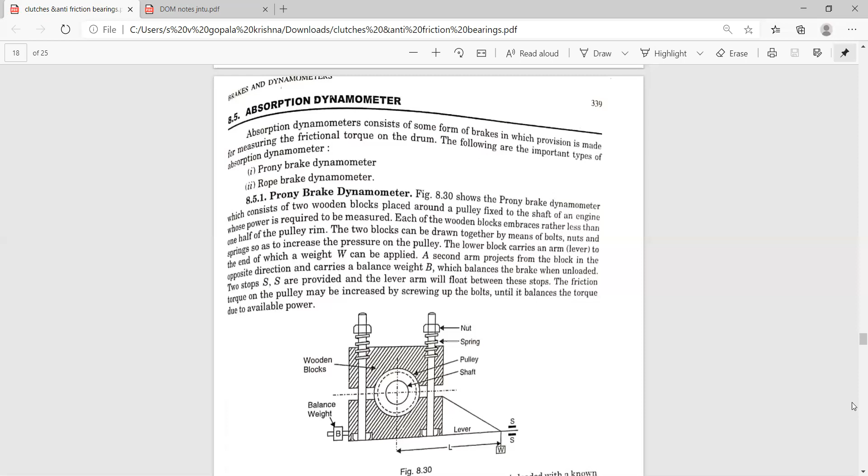Coming to the Prony brake dynamometer, observe the diagram. It consists of two wooden blocks arranged around the fixed pulley of an engine, fixed to the shaft of the engine.

These two wooden blocks are placed upon the pulley shaft. One block is put on the lower side of the pulley, and another block is put on the upper side of the pulley.

These two wooden blocks are tightened with the help of bolt, nut and springs.

The lower wooden block has one lever. One end of that lever carries the weights, and the other end carries some balancing weight. Whatever weights are carried, that dead weight is carried on another side, the right side.

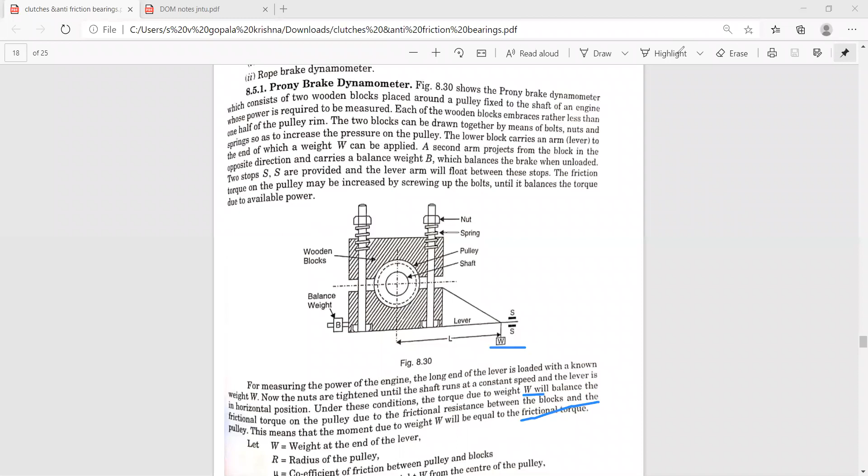Okay, frictional torque. Now all of you observe that. So here you will have some small calculation portions. Just observe that before going to that portion. So we will know the notations.

So those are the W, weight at the end of the lever, capital R, radius of the pulley, mu, coefficient of friction, and L, just all of you observe the diagram. L is the horizontal distance of the weight from the center of the pulley, and n, speed of the shaft in rpm. Now torque on the shaft, T equals load into perpendicular distance.

So the load is how much load is carried at the end of the lever, capital W, into distance L.

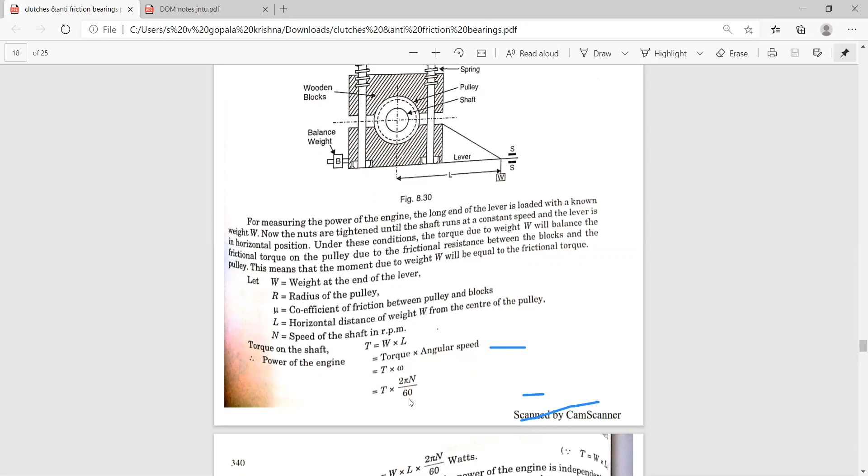Now power of the engine means torque into speed, angular speed. So that is torque value T and angular speed represented with omega. Then omega is also replaced with 2 pi n by 60. So then the value is WL into 2 pi n by 60 when we substitute the T value in our equation. So this is the power of the engine.

So here one of the conditions is there: the power of the engine is independent of the pulley.

This is following some factors: the radius of the pulley is one of the things, coefficient of friction between the pulley and wooden blocks, and pressure exerted by tightening the nuts. So these values are not affecting the power of the engine.

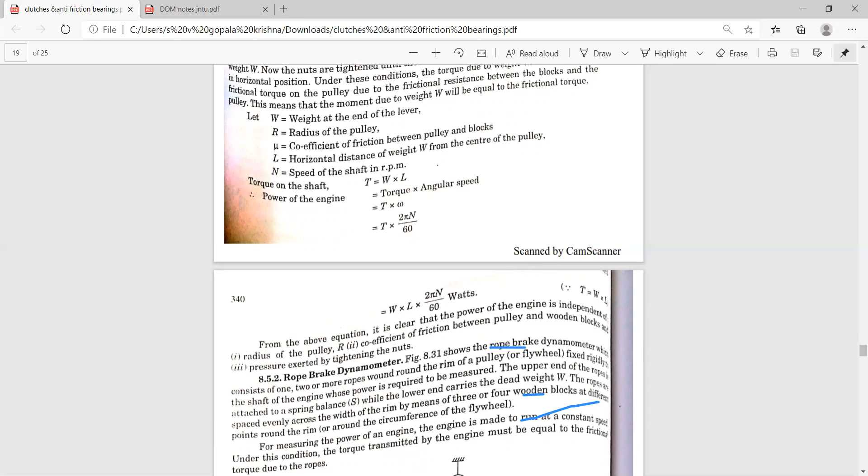Now going to the next topic, that is another type: rope brake dynamometer. Just observe the diagram, rope brake dynamometer.

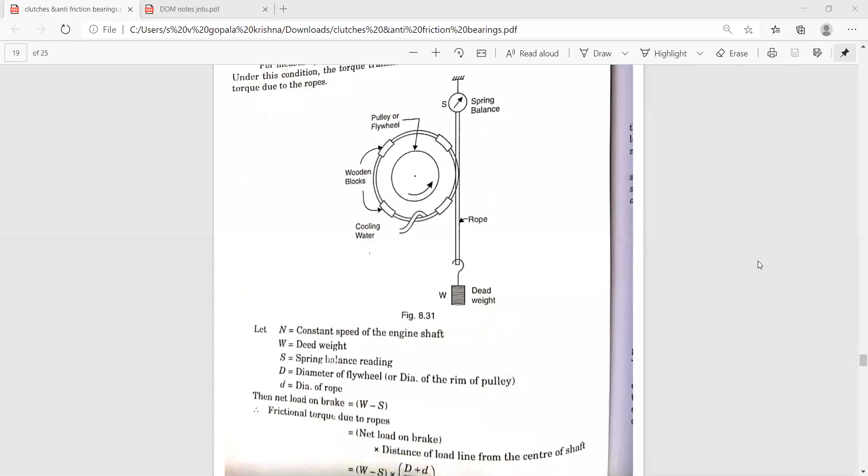So here, if you observe the diagram, rope brake dynamometer, it is consisting of one or two ropes around the rim of the pulley. This is the rope, and that rope is around the rim of the pulley.

The upper end of the rope is attached to the spring balance, and the lower end of the rope is carrying the dead weight.

These ropes are spaced evenly across, spaced with the wooden blocks. So here we may also use 4 wooden blocks at different points: one, two, three, four points are there.

So this is the arrangement in our rope brake dynamometer. So when we are measuring the power of the engine, the engine is made to run at constant speed, so the shaft, pulley, and flywheel run with a constant speed.

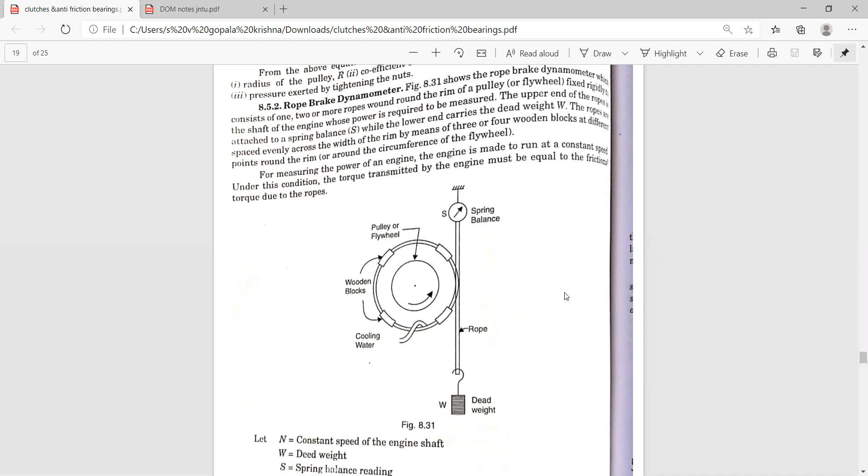So now we are also having a small calculation part here, with the arrangement shown. Now let us know our notations: N, constant speed of the engine, W, dead weight, S, spring balance, capital D, diameter of the flywheel, and small d, diameter of the rope.

Now we are taking net load on the brake: how much weight is applied here. That is capital W subtracted by the spring balance weight S, so W minus S is the net load on the brake. Now going to write the frictional torque due to the ropes.

So that is our net load into net load on the brake into distance of the load line from the center of the shaft. So frictional torque, that means the value is load into our perpendicular distance. So the load value is W minus S into distance of the load line from the center of the shaft.

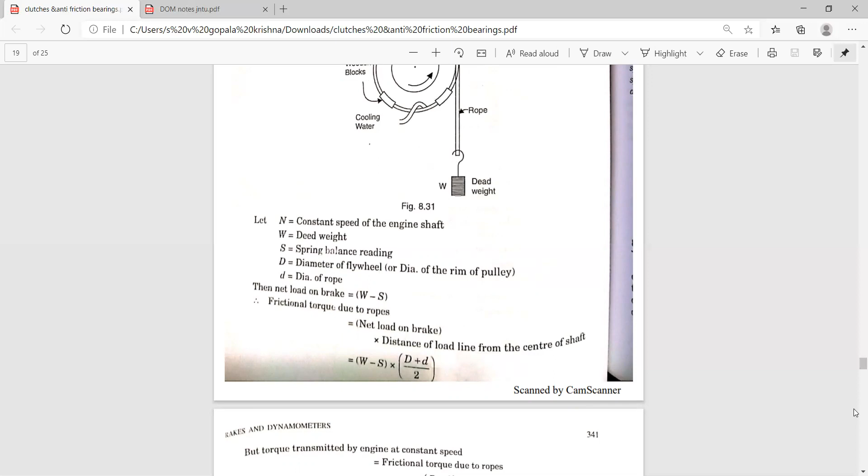That is capital D, the pulley or rim diameter, plus dia of the rope, divided by 2. That is the average of that one.

Torque transmitted by the engine at constant speed is also similar to that one: W minus S into capital D plus small d by 2. That is frictional torque due to the ropes.

Therefore, brake power of the engine equals torque transmitted by the engine into angular speed of the engine. So the torque value is W minus S into capital D plus small d by 2, into omega. Omega is replaced with 2 pi n by 60 in the next step. So then the value is W minus S into capital D plus small d by 2, into 2 pi n.

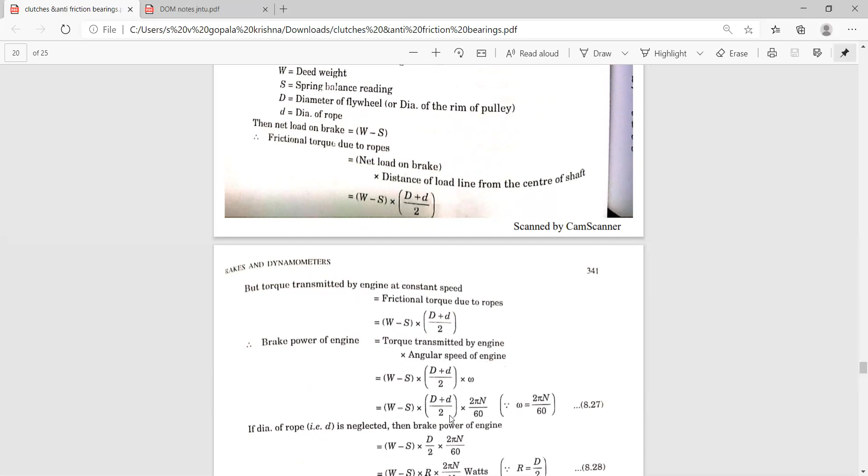Now consider one condition: when the rope dia is neglected in our equation. Then the brake power of the engine equals W minus S into capital D by 2 into 2 pi n by 60. It may also be written as W minus S into R into 2 pi n by 60 watts. This condition is also there.

They may also arrange a cooling system for the rope brake dynamometer. If the brake power of the engine is very large, it may produce more friction between the rope and our flywheel. So for cooling, we may arrange a cooling system for reducing the friction levels between the rope and the flywheel.

In this setup, cooling is also given to the pulley. One side arranges to cool it by sending water through one channel section, and on another channel side the cold water is supplied at one point and removed at another channel section. So the water is also wetted to our rim and our rope. That is also what happens in this particular system.

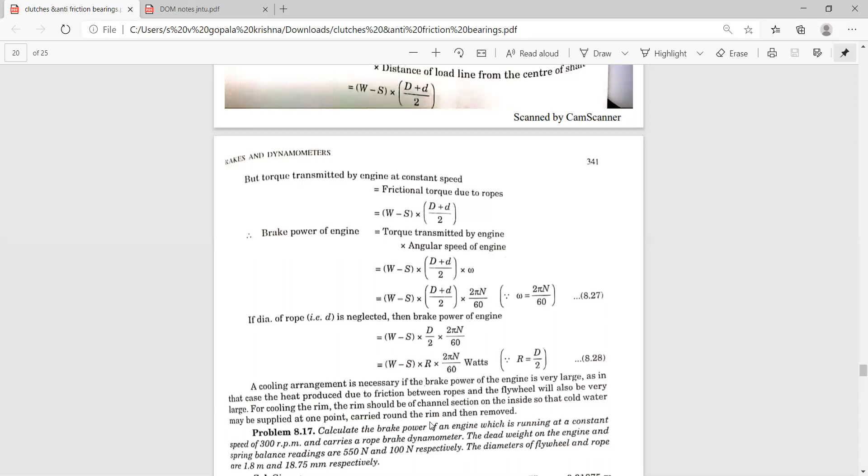Now observe this small problem: calculate the brake power of the engine, which is running at a constant speed of 300 rpm and carries a rope brake dynamometer. The dead weight of the engine and the spring balance readings are 550 newtons and 100 newtons respectively. The dia of the flywheel and rope are 1.8 meters and 18.75 mm respectively.

So now from the problem description, we will write our given values: N is 300 rpm, W is 550 newtons, S is 100 newtons, capital D is 1.8 meters, small d is 0.01875 meters.

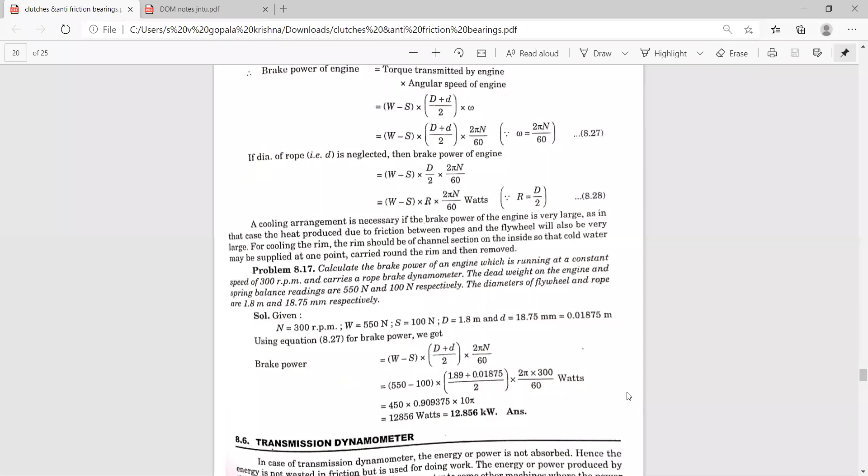In this problem, just directly substitute into the brake power formula: brake power of the engine equals W minus S into capital D plus small d by 2, into 2 pi n by 60. Substituting all the values, we get 12,856 watts, which may also be written as 12.856 kilowatts.

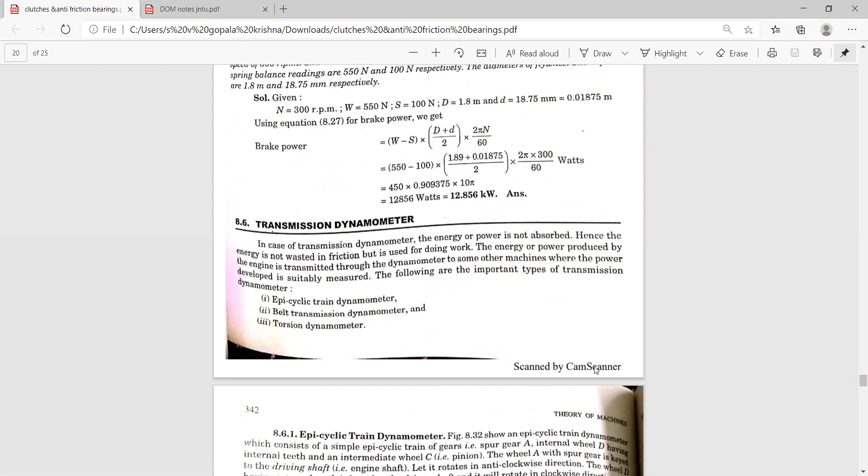Now going to the next one: transmission dynamometer. From the transmission dynamometer point of view, the frictional torque that is produced when applying brakes is also utilized, meaning that power is not wasted. It will make some work or perform some function. This happens in our transmission dynamometer, which is also a measuring device.

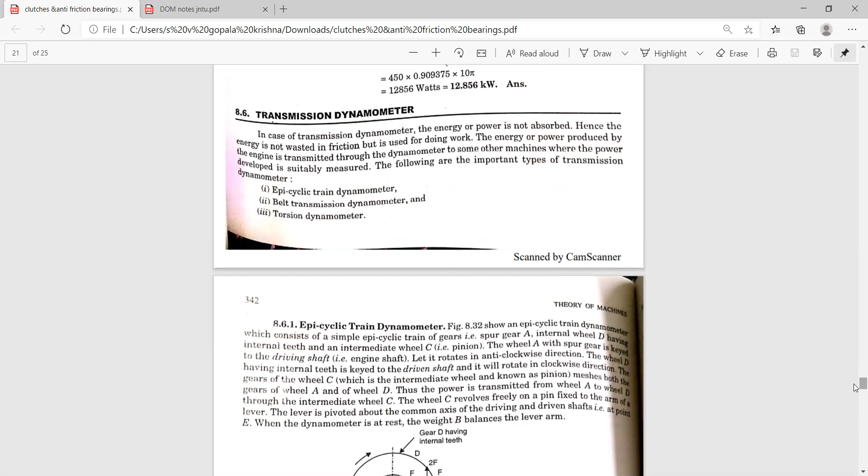It is again classified into three types: epicyclic dynamometer, belt transmission dynamometer, and torsion dynamometer. Now coming to the first one, let us look at the epicyclic dynamometer. Just observe the diagram.

Epicyclic dynamometer is here. It is consisting of epicyclic train of gears. Spur gear A is there, intermediate gear C, and annulus gear or internal gear D is there. The internal gear is having internal teeth - this is the annulus gear. Gear D has internal teeth, pinion gear C is there, and spur gear A is there. So what is the system? That is the epicyclic train of gears.

In this system we are also having a lever or lever arm. That lever arm passes through and is connected with the gears. The lever is pivoted at point E, that lever end is pivoted to point E.

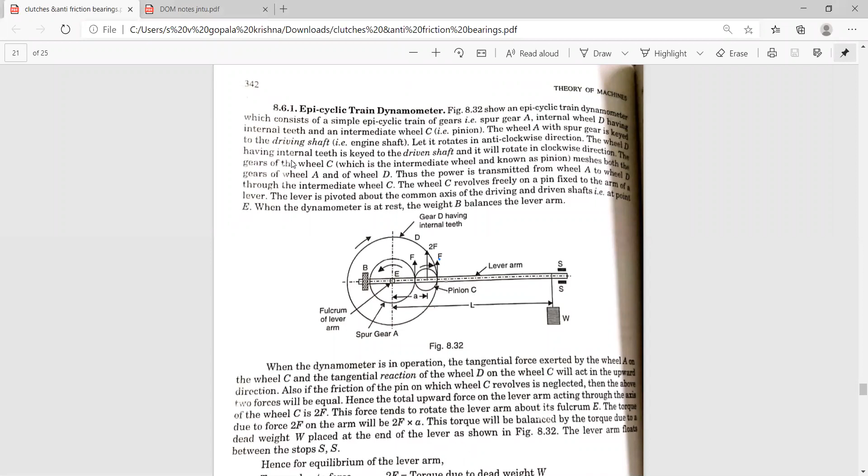Now, taking the equilibrium condition, consider the equilibrium of the lever. Torque due to the force, that is 2F into a, equals W into L. From that, F equals WL by 2a.

Now, torque transmitted by the engine - simply write it as force into distance. That force value is how much?

WL by 2a into R is there. R is the okay value is there. R, capital R, is the radius of wheel A.

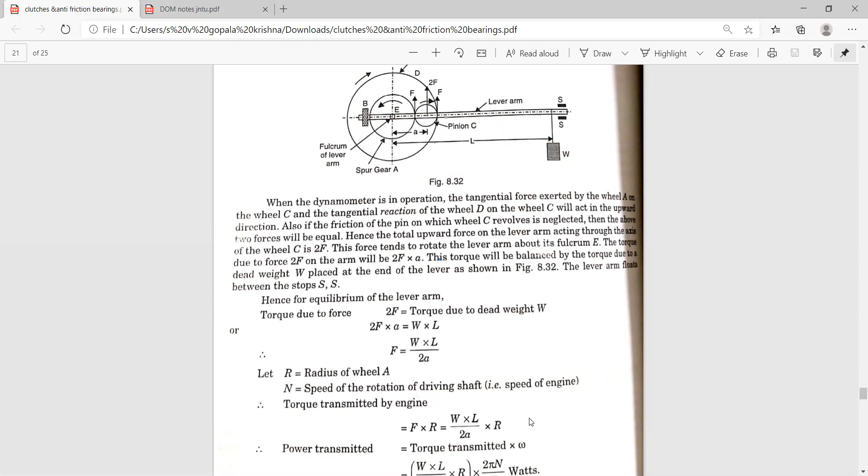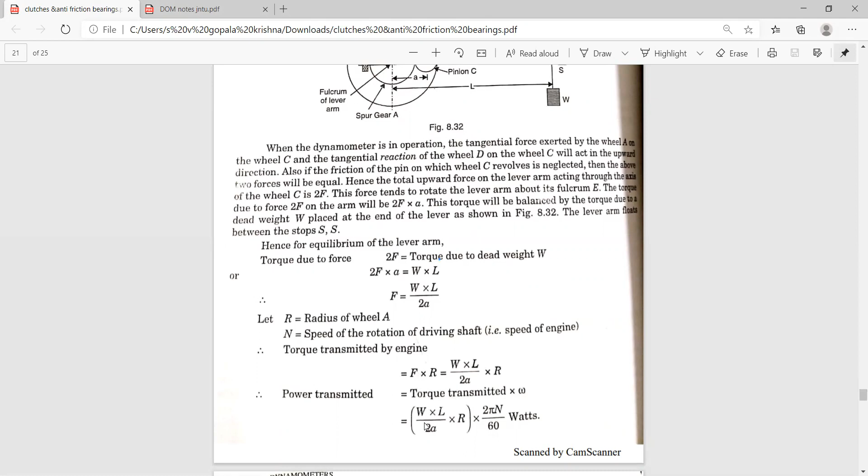Now the power value. We may also write the power transmitted on the engine. That is the torque transmitted into omega, the angular speed, angular velocity.

So then that means WL by 2a into R into 2 pi n by 60. So that is our epicyclic transmission dynamometer. Here observe what gears are involved, and how to transmit the power.

That transmits the power means, observe that the spur gear A rotates in the anti-clockwise direction. Then it will transmit the power from A to the pinion gear C, and the pinion gear also transmits the power to the gear wheel D.

When the system is in stationary mode, it may also try to balance the particular lever with the help of a balance weight, our balanced weight.

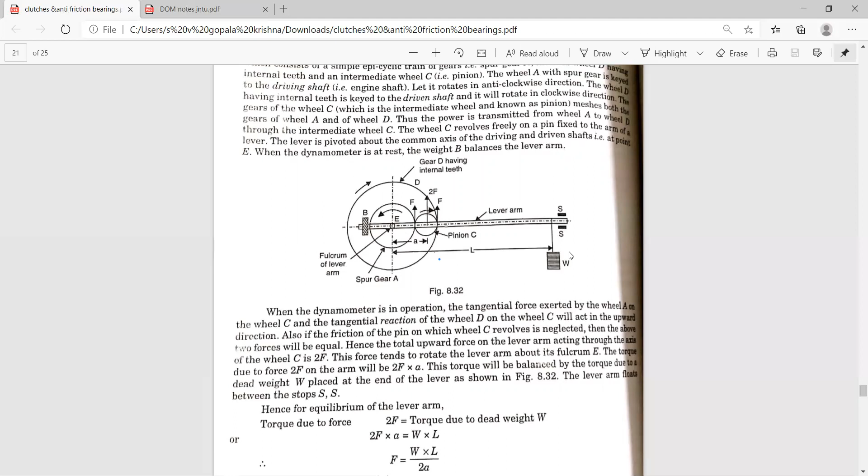So this is our epicyclic transmission dynamometer. Now going to see the belt transmission dynamometer. Observe the arrangement of the belt transmission dynamometer.

Mainly there is usage of two pulleys. One is acting as the driving pulley and another as the driven pulley. And there are two supporting pulleys, the intermediate pulleys C and D.

Now we also take one lever. That lever is pivoted at E, and it passes through the C and D pulleys also. The lever carries a dead weight on one side, and that lever end is also between two stops.

Two stops, and another end is carrying the balancing weight. So now we are having our belts.

Now we give the belt system, the belt passes through our particular pulleys. When we arrange the belt from the driving pulley to the driven pulley, it also crosses our intermediate pulleys D and C. So that is the system, observe that.

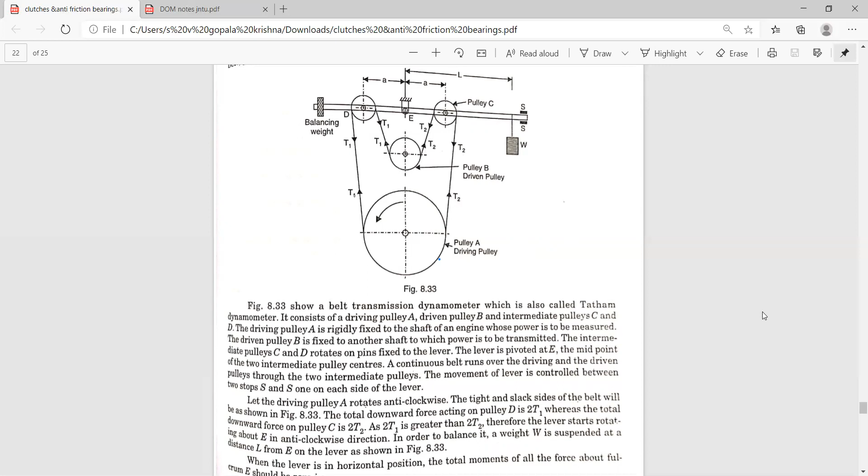Now, when the lever is in horizontal position, the total moments of all forces about the fulcrum, capital E, should be zero. So they say that when the lever is in horizontal position, that means it will be balanced, so the moments of all forces about fulcrum E should be zero. So then total anti-clockwise moment, and total clockwise moment - they take the momentums to the anti-clockwise and clockwise directions.

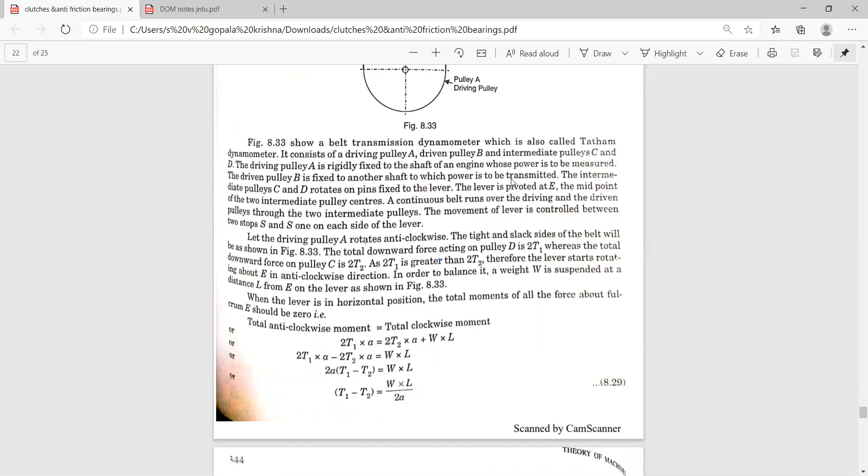Those are 2T1 into small a. Why? Because of the distance between our tensions - that means the pulley D tension and pulley C tension. a, a is there, and L is the distance from the dead weight to the pivoted point.

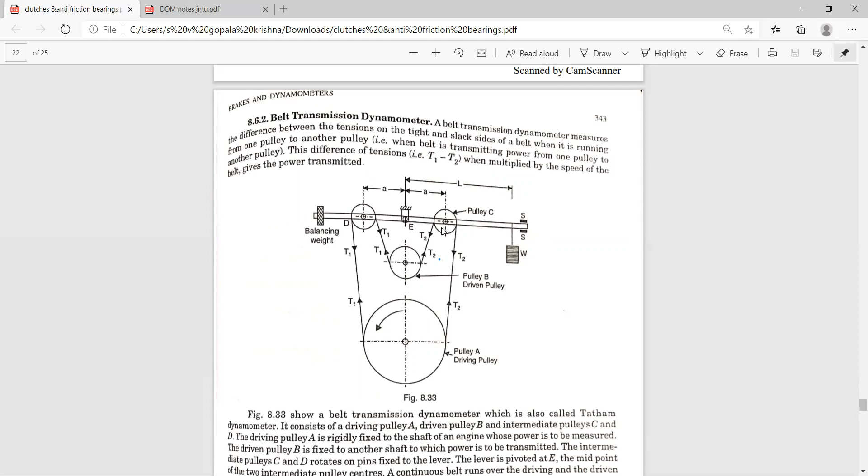So now you observe the moment at the pivoted point, capital E. That is 2T1 into A equals to 2T2 into A plus WL. Now, simplifying the equation, you may write T1 minus T2 equals to WL by 2A.

So now they also write the power of the engine. Why? Because tension is already calculated here, between the tight side and slack side - that is T1 minus T2 equals WL by 2A.

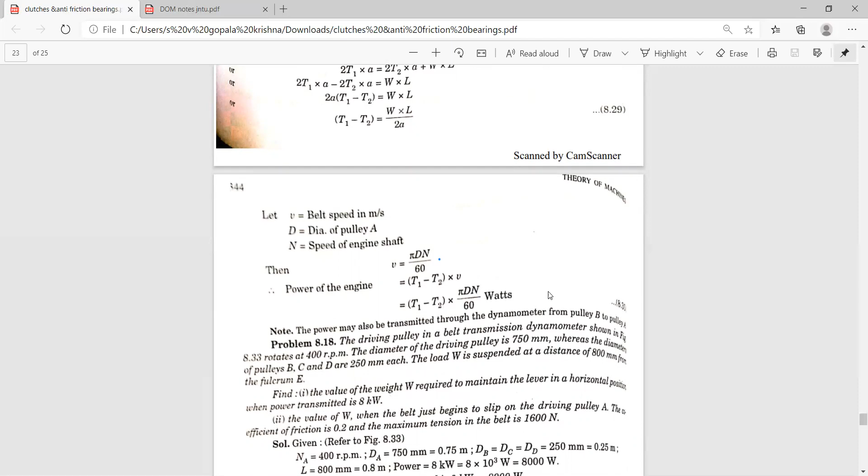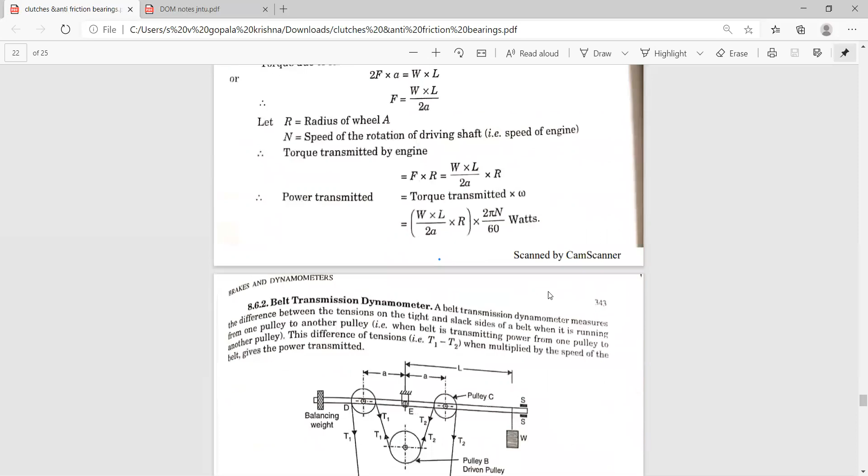Then power of the engine equals T1 minus T2 into V, the belt speed. So T1 minus T2 into V can similarly be written as pi dn by 60, just substituting the value. So this is the power of the engine for this belt transmission dynamometer.

Now the last one, the torsion dynamometer. Observe that it works on the principle of torsion - that means when we are twisting our shaft, we get some torsion.

So we take the torsional equation directly: T by J equals C theta by L, with values already known. So T by J equals C theta by L, and similarly torque T equals C theta by L into J. J is substituted here as pi by 32 into D naught power 4 minus Di power 4 for hollow shafts, while for solid shaft it's pi by 32 D power 4.

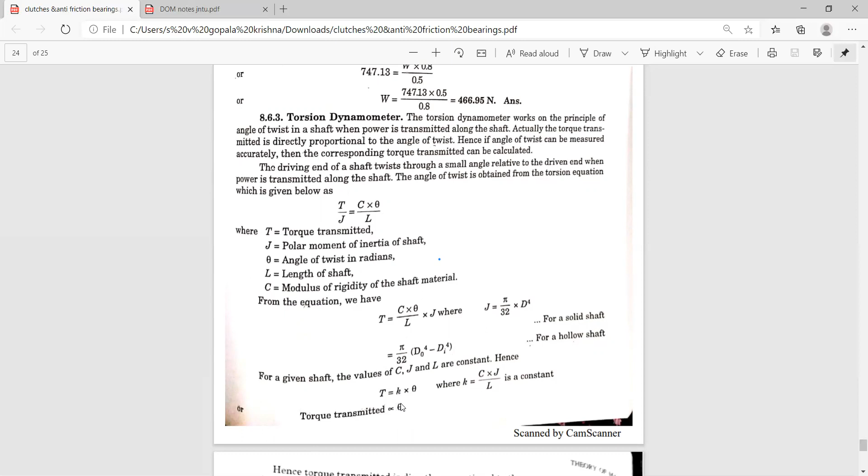So T equals K theta. They write it as T equals K theta because C, J, L are all considered constants. That means torque transmitted is proportional to the angle of twist theta - torque transmitted to angle of twist theta. So that is the torsion point of view.

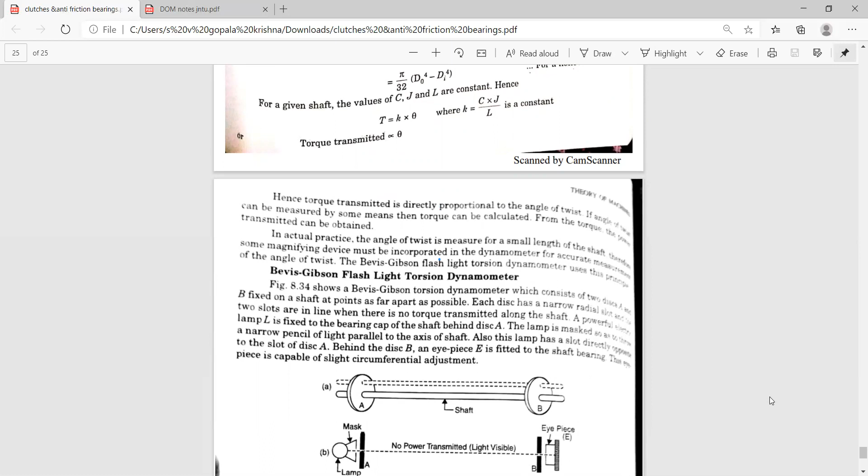And here, what type of dynamometer is there? That is taken as the Bevis Gibson flashlight torsion dynamometer.

Okay, A and B both are having the slots. Here, just observe that each disc has a narrow radial slot.

The slot and the lamp, and the two slots are in line. When there is no torque transmitted along the shaft, a powerful electrical lamp L is fixed to the bearing cap of the shaft behind A, and the lamp is masked so as to throw a narrow pencil of light parallel to the axis of the shaft. So this lamp has a slot directly opposite to the slot of disc A.

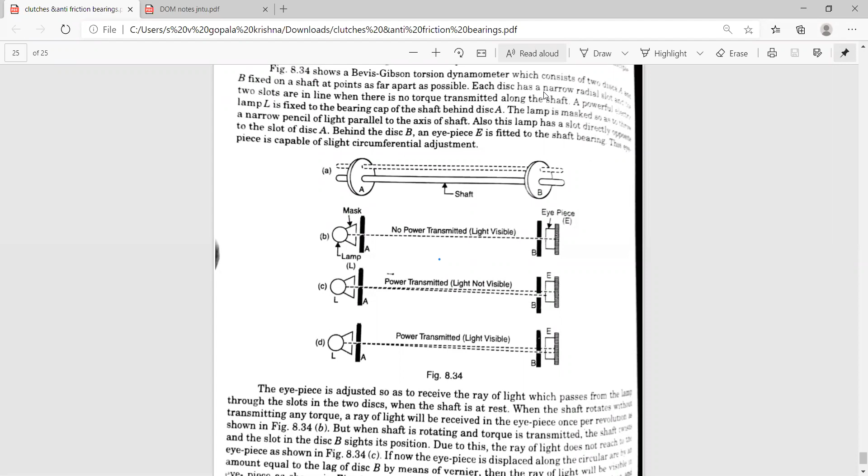And when the shaft is rotated without transmitting any torque, a ray of light will be received in the eyepiece once per revolution, as in figure B.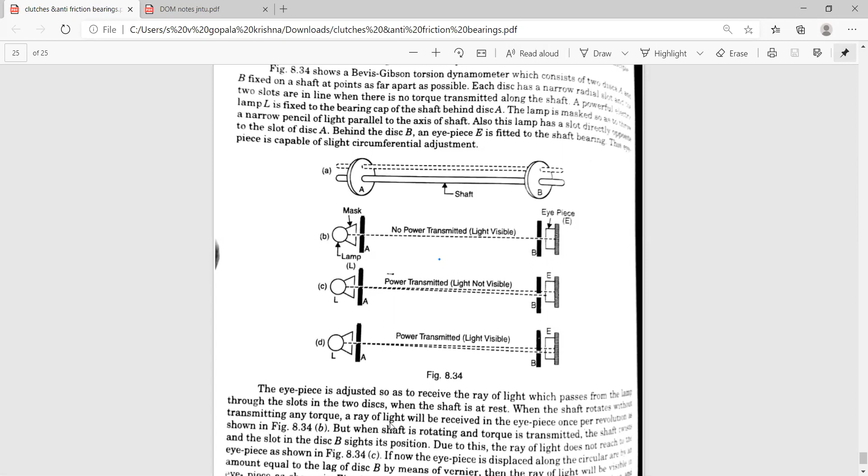But when the shaft is rotating and torque is transmitted, the slot in disc B shifts its position, and the ray of light does not reach the eyepiece, as shown in figure C. From figure C it may also happen.

Now the eyepiece is displaced along the circular arc by an amount equal to the lag of disc B by means of a vernier. The ray of light will be visible on the eyepiece, as in figure D.

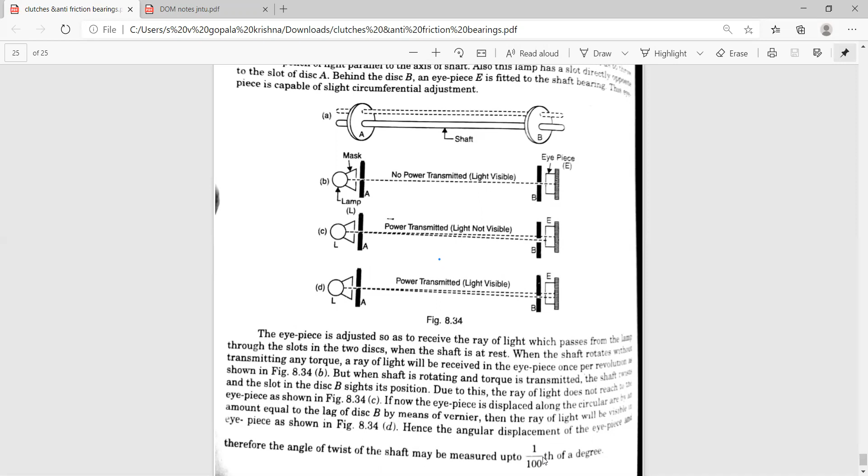From that angular displacement of the eyepiece, and therefore the angle of twist of the shaft, may be measured with the help of the vernier, to an accuracy of 1/100th of a degree. That much accuracy is achieved with this particular arrangement.

This is our Bevis Gibson flashlight, the Bevis Gibson flashlight torsion dynamometer.

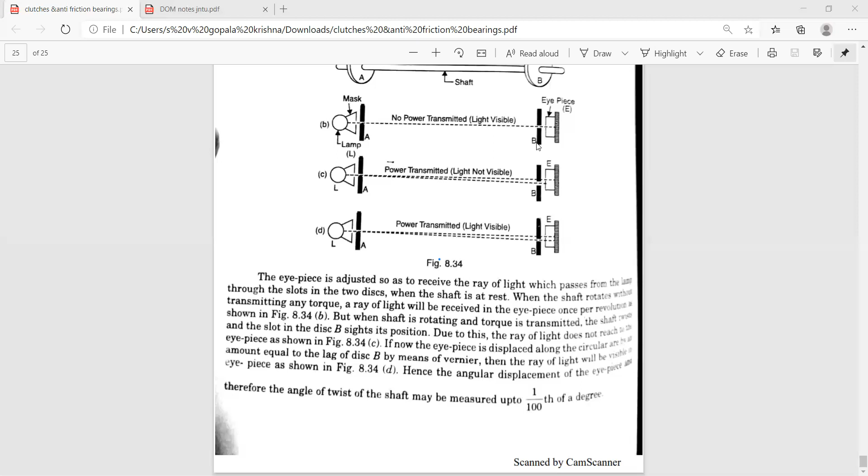So already we have covered the dynamometers topic. There are two types of dynamometers: absorption dynamometer and transmission dynamometer. Again those are classified - from the absorption point of view, Prony brake dynamometer and rope brake dynamometer. From the transmission dynamometer point of view, three types are there: epicyclic transmission dynamometer, belt transmission dynamometer, and torsion dynamometer. So those are already covered.

If you are having any queries, please ask me. Now we are going to another topic, the third chapter, third unit - inertia forces, turning moment diagram.

Before going to the topic, let us discuss the basics, that is the inertia forces in reciprocating parts. Some dynamic analysis of the slider crank chain mechanism is also there. So now, inertia forces in reciprocating parts.

So inertia means, how do we say that? Simply, it is a property of matter by virtue of which a body resists any change in velocity. And inertia force means it is an imaginary force which, when it acts upon a rigid body, brings the body into an equilibrium position.

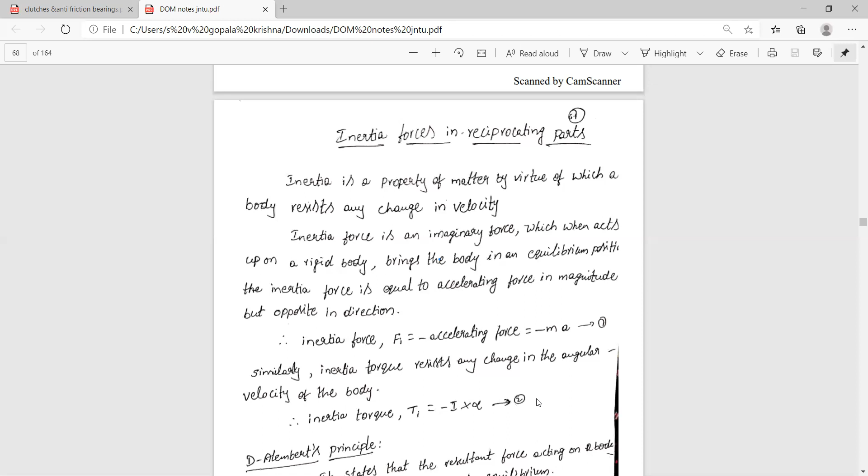Similarly, inertia torque equals to minus I into alpha, taken as equation number 2. So from D'Alembert's principle, it may also state that the resultant force acting on a body together with the inertia force are in equilibrium.

So that is D'Alembert's principle: resultant force acting on a body together with the inertia force are in equilibrium. That means F suffix R, resultant force, plus inertia F suffix I equals to 0, taken as equation number 3. According to Newton's second law of motion, the resultant force also equals to the product of mass of the body and acceleration of the center of mass of the body.

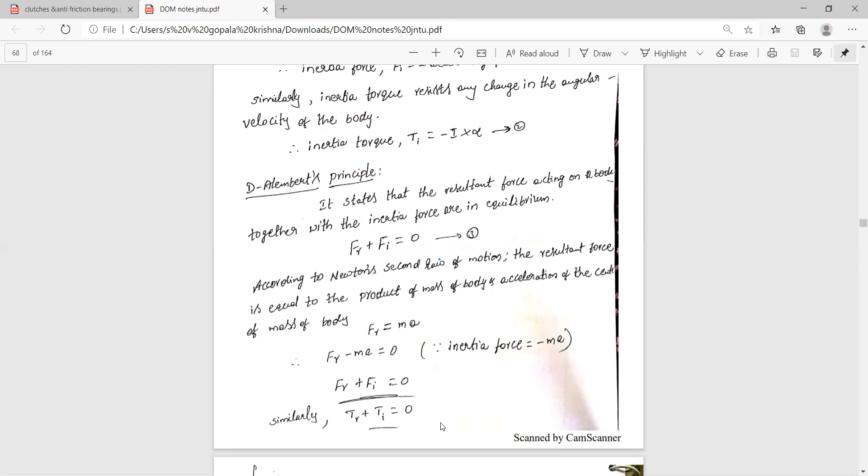So F suffix R equals to M into A. So Fr minus Ma equals to 0. That minus Ma may also be written as Fi, so Fr plus Fi equals to 0. So what we said in our statement is proved here. Similarly, Tr plus Ti equals to 0. So that is our inertia force. D'Alembert's principle: resultant force also equals to the inertia force.

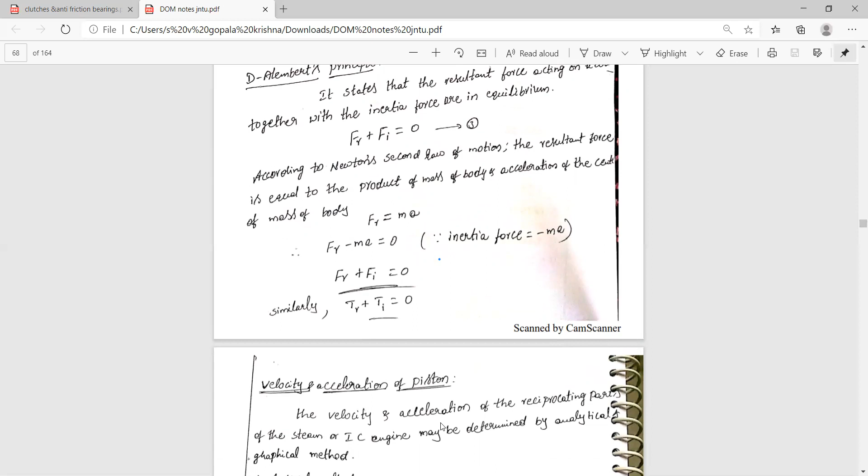Now going to see the next topic, velocity and acceleration of the piston. So how we calculate the velocity and acceleration of the piston. Observe that when we calculate the piston velocity and acceleration, let us take our IC engine.

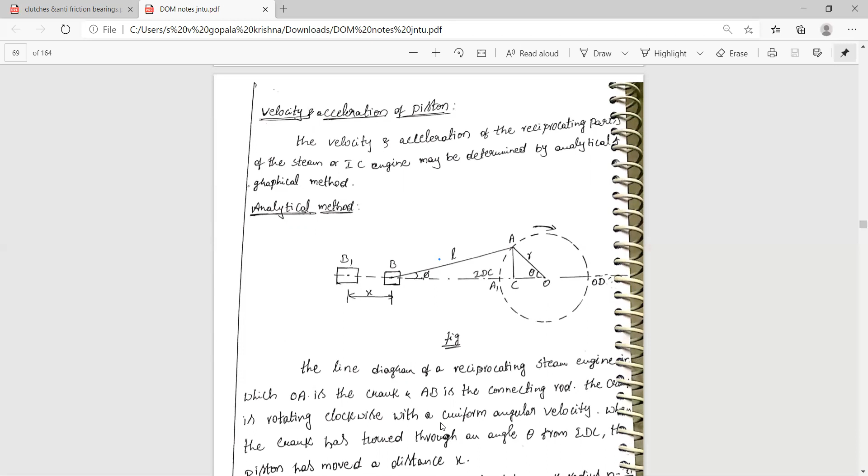Just we will see our IC engine piston velocity and accelerations. It may also be determined in two ways, analytical and graphical methods. Let us take the analytical method. From the analytical method point of view, observe our diagram.

All of you observe that. So crank is there. We will take the slider crank chain mechanism here. We may also give some notations. The crank is having a radius of small r, represented with OA, and connecting rod AB has length small l, and IDC is there.

Observe that IDC and ODC - left side is IDC and right side is ODC. When the crank is rotated with angular velocity omega, and OA is also translated to OA1, then the connecting rod AB is also translated to A1B1. Then here the angle between our crank and the horizontal axis is theta.

It makes a theta angle between the horizontal axis and the crank, and phi angle between the connecting rod and the horizontal axis, at the IDC center. And the displacement value x may also be calculated - we will calculate that x value. Before that, we'll calculate x so we can find out our velocity and accelerations.

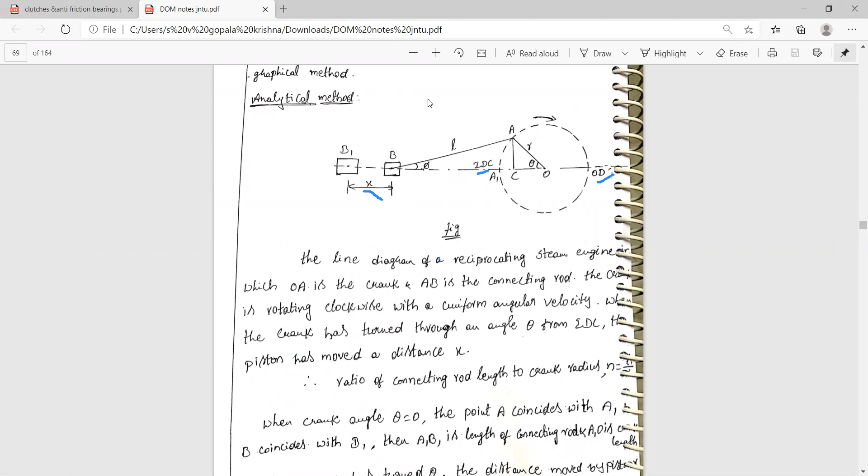For getting that value, observe that. Here one of the symbols represented here is n, where small n equals to L by R, small L equals to n into R. That representation is also here.

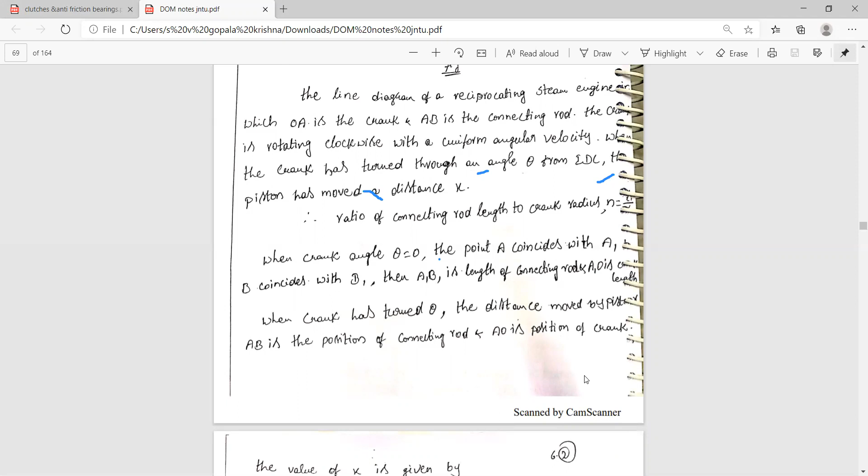Now observe that when the crank is turned through angle theta, the distance moved by the piston - AB is the position of connecting rod, and AO is the position of crank. It is translated to OA, OA is shifted to OA1, and AB is shifted to A1B1. So then the value of x is given by x equals to B1B, which equals to B1O minus BO.

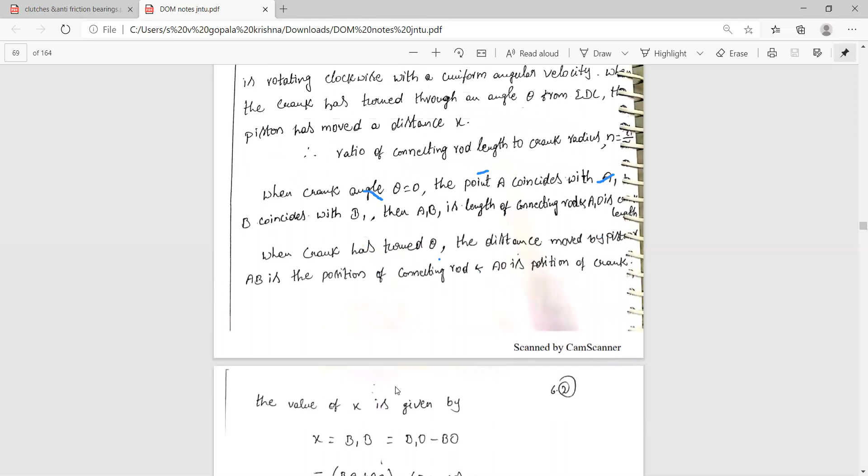From the diagram, B1O may also be written as B1A1 plus A1O, and BO written as BC plus OC.

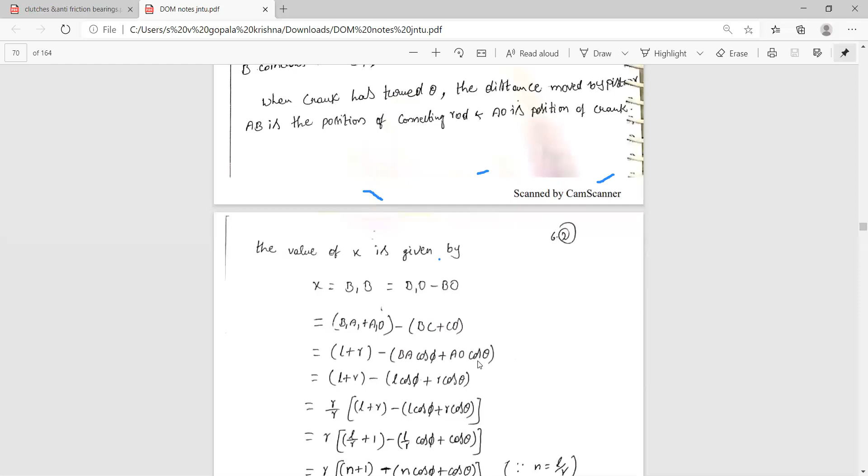B1A1 plus A1O, and BC plus CO. B1A1 is the already known value, that is L, and A1O means R, and BC plus CO is there. BC is also written as BA cos phi plus CO is written as AO cos theta. BA means the already known value, that is L cos phi plus R cos theta.

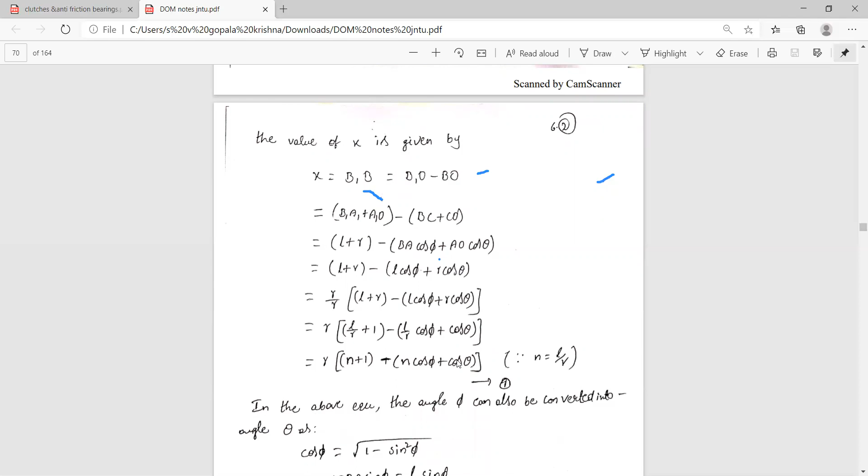So the equation is multiplied and divided by R, that is R by R into our equation. So R into, dividing our total equation, that gives L by R plus 1 minus L by R, cos phi plus cos theta. So R into L by R means the known value n, plus 1 minus n, cos phi plus cos theta. This is taken as equation number 1.

So our x value, the displacement, has two unknowns, theta and phi. When we have two unknowns, it is not possible to differentiate to get the velocity and acceleration. That's why we try to simplify the equation.

With the help of the identity cos phi equals square root of 1 minus sin square phi, since sin square phi plus cos square phi equals 1, from that cos phi equals square root of 1 minus sin square phi.

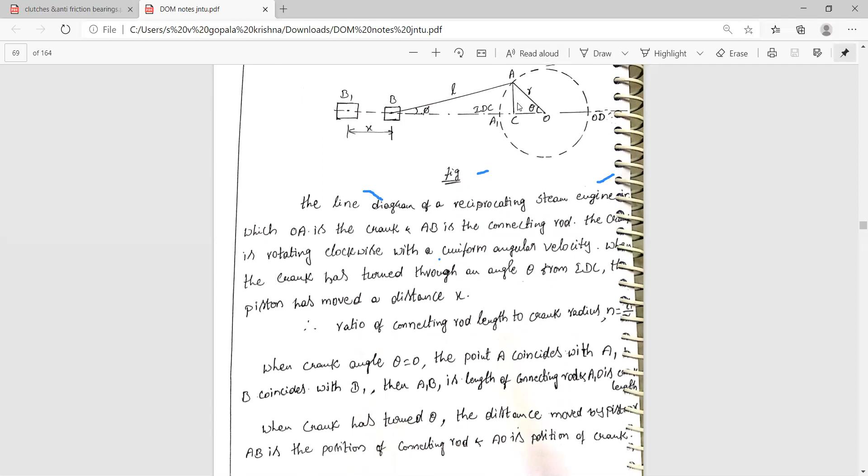In the triangle ABC, from triangle ABC, AC equals BA sin phi, that equals L sin phi, and from triangle AOC, AC equals R sin theta. Both triangles, ABC and AOC, share the same opposite side AC. The opposite side in triangle ABC is L sin phi, and in triangle AOC is R sin theta.

So L sin phi equals R sin theta. That means sin phi equals R by L sin theta, which is also written as sin theta by n. This is taken as equation number 2.

So we have the relation between phi and theta. Now we substitute these values into our earlier equation: cos phi equals square root of 1 minus (sin theta by n) whole square, which can be written as n square minus sin square theta by n square. Simplifying, that gives 1 by n into square root of n square minus sin square theta. Let us take this as equation number 3.

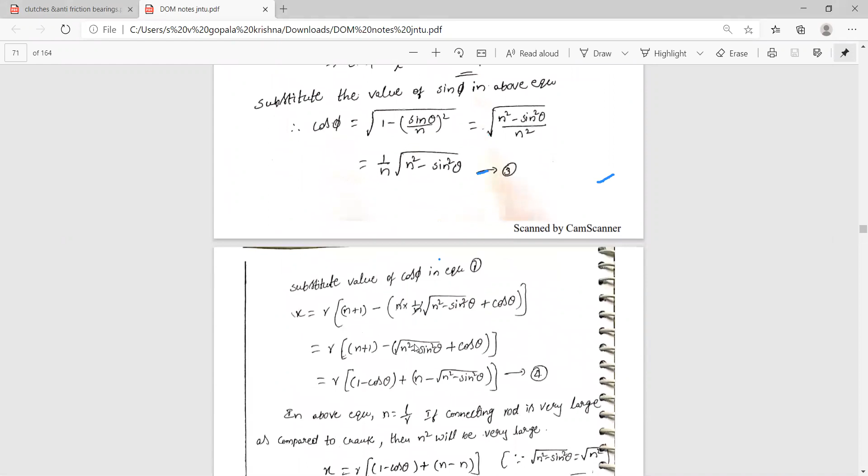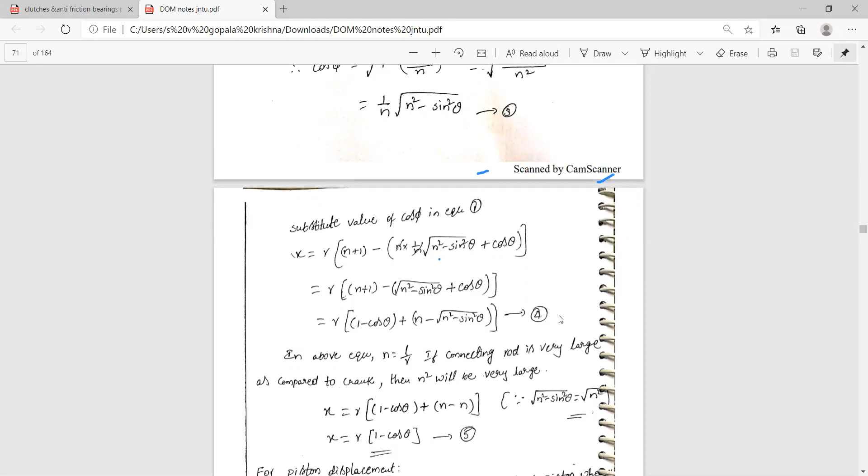Observe that cos phi is replaced with 1 by n into square root of n square minus sin square theta. Substituting this value of cos phi into equation number 1: x equals r into n plus 1 minus n into 1 by n into square root of n square minus sin square theta plus cos theta. Cancelling n, we finally get x equals r into 1 minus cos theta plus n minus square root of n square minus sin square theta. This is taken as equation number 4.

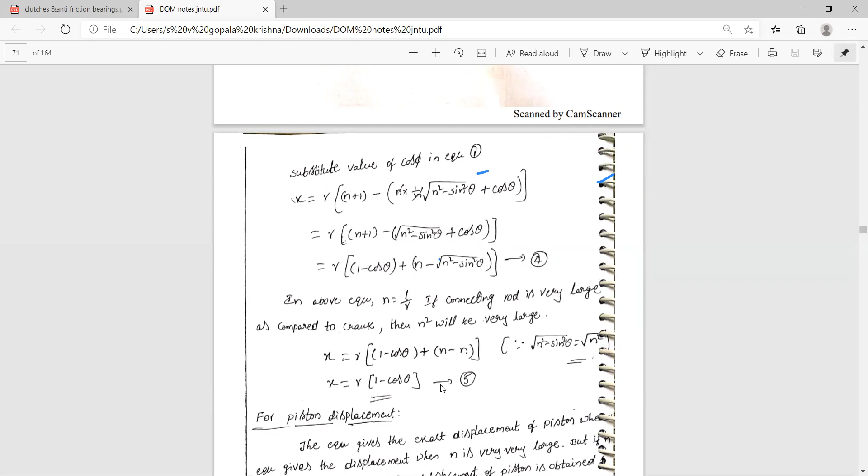Now, n equals L by R, but if the connecting rod is very large compared to the crank, then n square will be very large, so sin theta can be neglected. When neglected, x equals r into 1 minus cos theta plus n minus the total equation gives n only, so n cancels to zero. The remaining term is x equals r into 1 minus cos theta, which is the displacement.